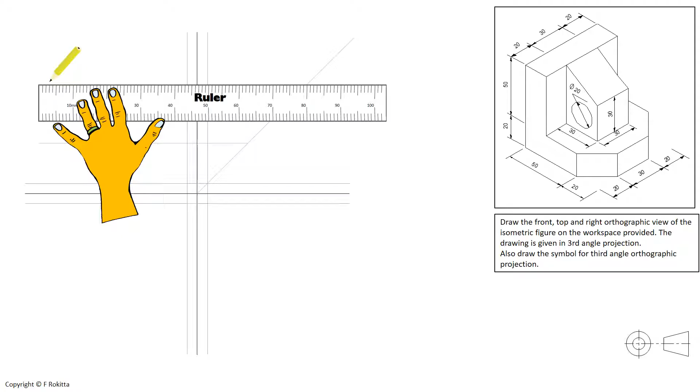The next distance is 30 millimeters, as you can see on the far right on the example, and we will draw a light construction line from the top view onto our 45-degree mirror line. And lastly we will end with the next 20 millimeters construction line.

Now we will continue with the measurements of our top view. Look closely at the 3D example on your right and you will see that the total length of the front view is 70 millimeters. That is made up out of the 50 and the 20 as you see on the 3D example. It also means that the total length of our top view will be 70 millimeters.

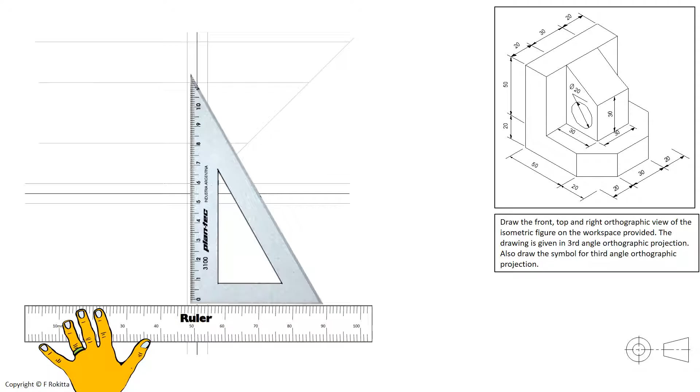We start by placing our ruler and set square parallel to the y-axis. Then from the anchor point of our top view we will measure to the left 70 millimeters and draw a light construction line at a length of 70 millimeters. We will carry this construction line down all the way to the front view.

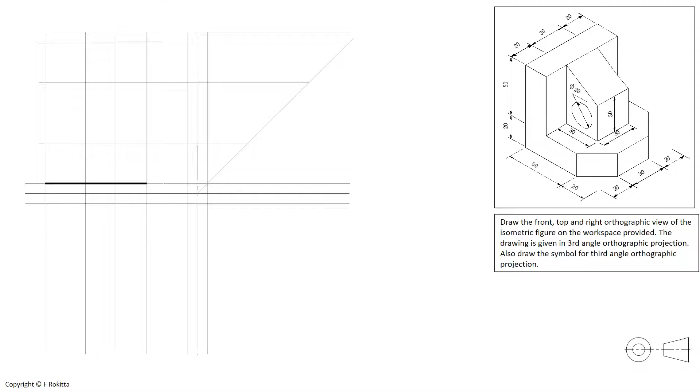We will now add all the other lengths as we carry them over from the 3D example onto our top view, and we project the lines all the way down to the front view once again. Once we've done this, we will start by placing the outline of our top view in solid lines as shown here. Make sure that you work neat and accurate and that you add all detail.

We also need to add the center line for the circle if the circle was asked for hidden detail. In this case, the question does not stipulate any hidden detail, but I add it so that you can see what to do if hidden detail were to be asked.

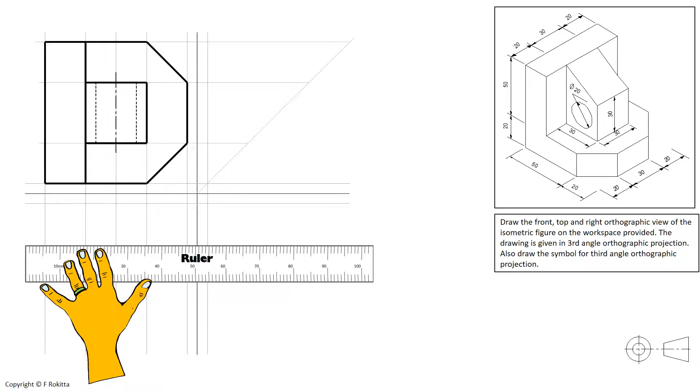Moving on to the front view. We will now closely inspect the 3D model provided and look at the different heights for the front view. We start by placing our ruler parallel to the x-axis and then measure from the anchor point of the front view all the different heights of our front view. And we will draw a light construction line at each one of these heights and carry them through to the right view.

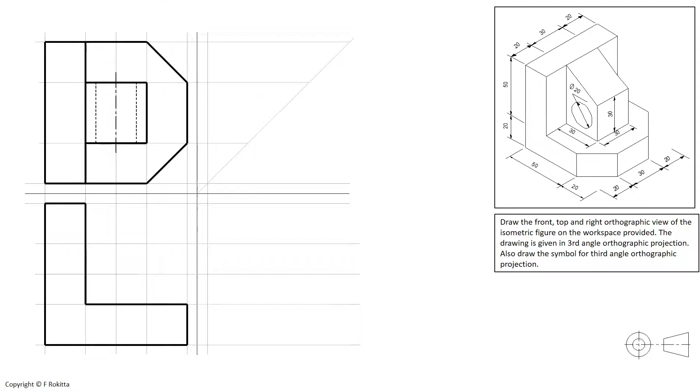Once we have completed all the measurements for the front view, we can start by drawing in the solid lines of the shape of the front view. Make sure that you draw neat and accurate and that you use the correct line tone for your lines. We also need to draw in the center lines for the circle because the circle will be visible from the front view.

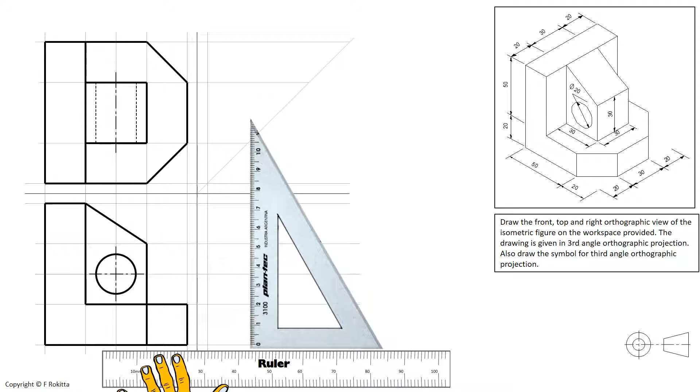Once the front view is done, we need to line up our set square parallel with the y-axis. Move your set square along with the 45-degree mirror line and project the construction lines down from the 45-degree mirror line onto the right view, as you can see here.

You will now notice the advantage of projecting all the heights and depths from your front and top view onto your right view. All we need to do is draw in the solid lines and all the detail of our right view as shown here. It is important to make sure that you have indeed carried over the correct measurements from your 3D example onto your model.

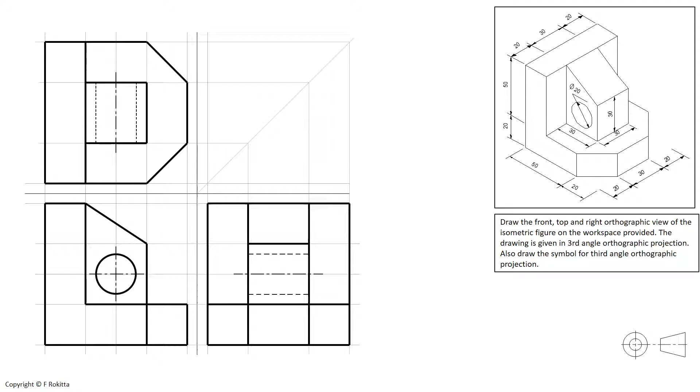We also have to indicate the center line for the circle, whether or not the hidden detail has been asked, because the circle is in fact still present. I add the hidden detail because I just want you to know what to do if hidden detail were to be asked.

Congratulations! You have successfully completed the tutorial.